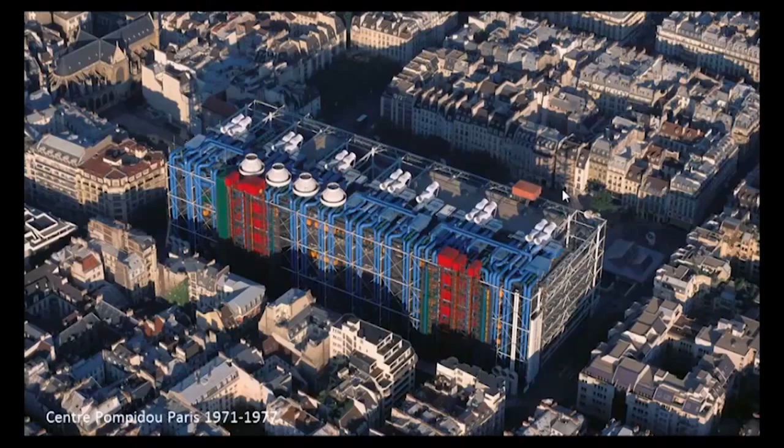And of course the structure, which was all brought to the outside of the building to create big, clear span, flexible exhibition space, so that this building could reinvent itself with each iteration of its life and each exhibition that came in. So you start to see these ideas coming in.

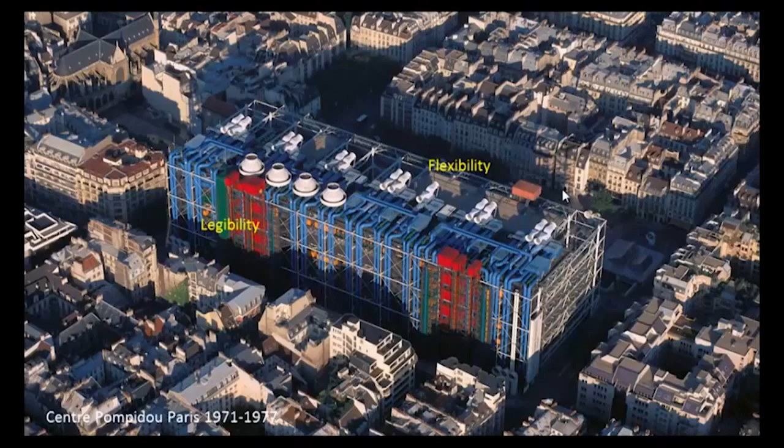One of the biggest things about this project, the reason they won it, was that they were the only entry from, whatever it was, 2,000 competition entries, that gave up half the site, made the building higher, broke the official 25-metre boundary for this part of Paris, in order to give up half the site to create a new public square. This is, again, at the very core of our architecture—that it isn't just about the buildings, it's about the setting and about giving something back to the city and creating a place as well as a building.

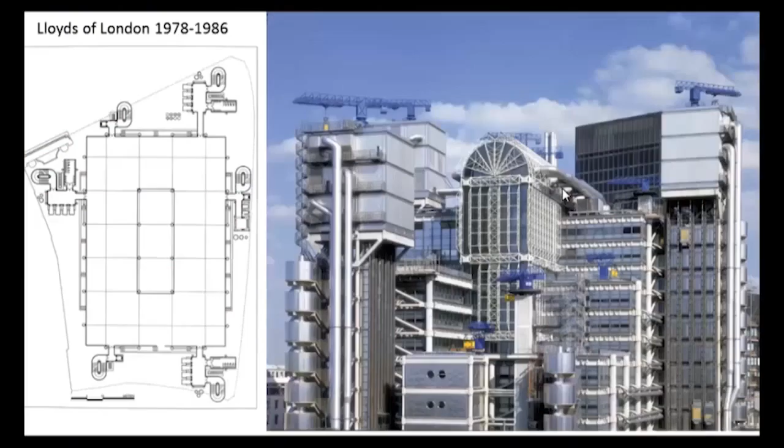I think these themes were explored further after the Pompidou Centre. Probably a few of you have seen 'The Brits Who Built the Modern World.' There's a series on at the moment, and they've been talking about how after the Pompidou Centre no one would give them any work because it was such a groundbreaking building. Even though it was very much acclaimed in France, I think the British public were a bit more wary about this kind of inside-out architecture.

But Lloyd's were very brave, and they gave this commission—they won this competition to build the new Lloyd's headquarters in London, which again has these ideas of legibility, where you can read the bits of the building, and of flexibility. The whole notion of this plan—what I think is most interesting about the Lloyd's building is the plan.

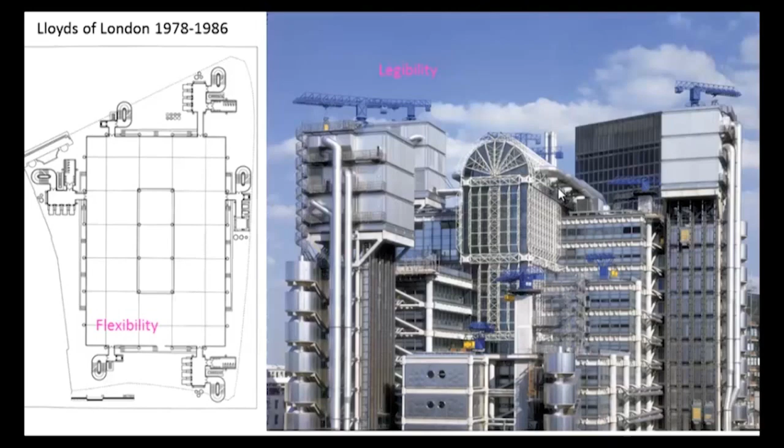It was a very strange shaped site, and they used the leftover space of the site to put all the cores to the outside of the building, something which traditionally sits in the middle of the building. This allowed them to create infinitely flexible floor plates, which became trading floors. This is kind of the birth of the trading floor, around this great atrium space in the middle, which was not what office buildings looked like at this point and was quite groundbreaking.

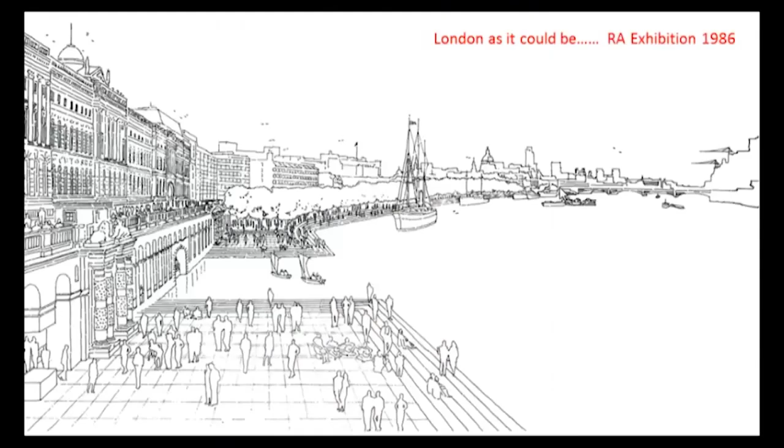The city—Richard has always had a preoccupation with the city and with urbanism, whether it's through influencing it academically in studies like this. This is what London could be: the embankment of the River Thames if there weren't cars hurtling down the side of it.

Rather nicer. Also through his politics, his involvement with the Urban Renaissance and the Labour Party and the GLA in shaping the way that London has grown. But also, to be honest, in shaping the skyline. Over the last 3 decades, there's 1 or 2 of our buildings that have appeared there, and some other equally shapely ones that aren't ours—part of an amazing changing city.

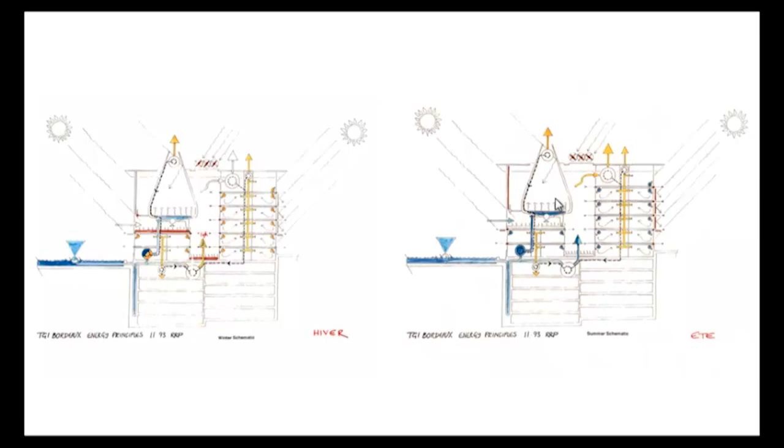And as the agendas are changing, looking also at sustainability in architecture and beginning to look at how our buildings could respond to a need for more sustainable design and be naturally ventilated and not rely on mechanical systems. Themes that, in Ivan's case, he continued to explore in the National Assembly for Wales.

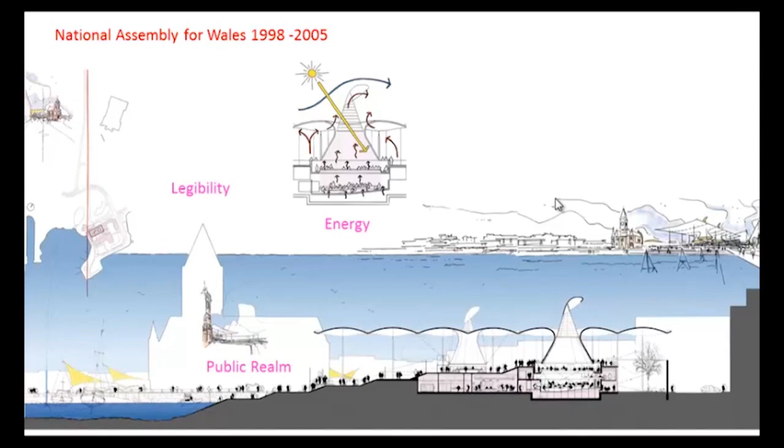And the debating chamber itself is a huge wind cowl that draws the natural ventilation through the building. Sadly, 9/11 changed the nature of this building a lot because this idea of access to the Parliament and the sort of freedom flowing of people, suddenly we had bomb-proof glass all the way around it, which changed the nature of the project a bit.

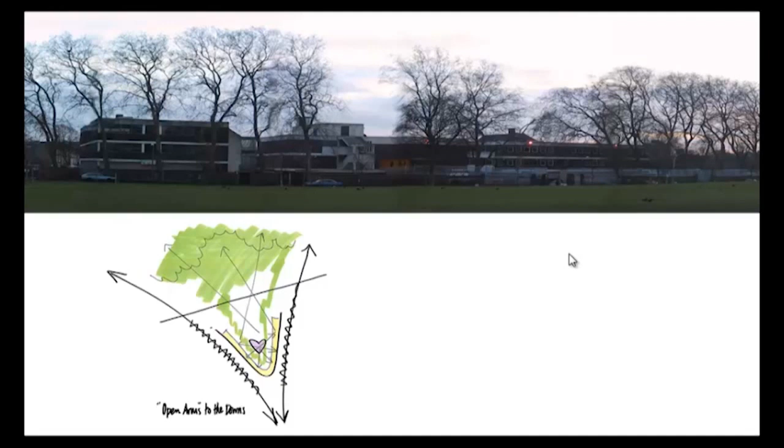In terms of the client and the setup of the project, we were very lucky because Michael Wilshaw, who is now well known for being the head of Ofsted, at the time was one of these super heads, and he'd been brought in to start this school from scratch. He was available, he was already on board by the time we were appointed. So we were able to work with the guy who was actually going to be running the school, which was fantastic.

So we had an amazing, enlightened client, and Michael had an incredibly strong view about how the school would be run. He wanted the design to encapsulate that, to facilitate it. But we also had to bear in mind that Michael might not run that school forever, and so it had to have enough flexibility to change if the way in which the school was being run changed.

But the idea was that he felt that the way you get the best out of schools was that he wanted to create a series of houses, in the sense of not a public school sense, but in the sense that he wanted to give autonomy and responsibility to the core curriculum areas. So there's a year 7, maths, English, dance and drama and ICT, and each one of these would have their own house, effectively.

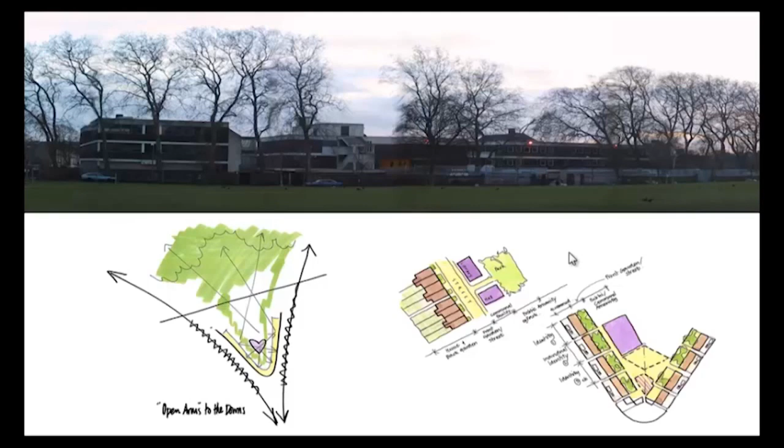And the idea was that the school is made up of a number of these houses along a street, albeit in our case a street that bends into a V, and that students would go to their house for the lesson in that subject and then move between houses, which is very different from the way that schools are set up.

And it meant that in terms of the section, this is a sort of notional section, it's only a 3-storey building, that it turns its back to the railway, so there's a completely solid wall running all the way around the back edge of the building, against which we created a top-lit resource space, kind of what would have been a library, I think, when I was at school, but a kind of computer resource space.

And then you move between these houses through a cloister, which is the sort of set back ground floor that you can see there. You enter the building at the ground floor of the house, you circulate up in the cores that separate the houses, and then there are 2 teaching spaces on the 1st and 2nd floor, which look out to the playground and to the downs beyond, but are accessed from galleried walkways which run past these triple height resource spaces.

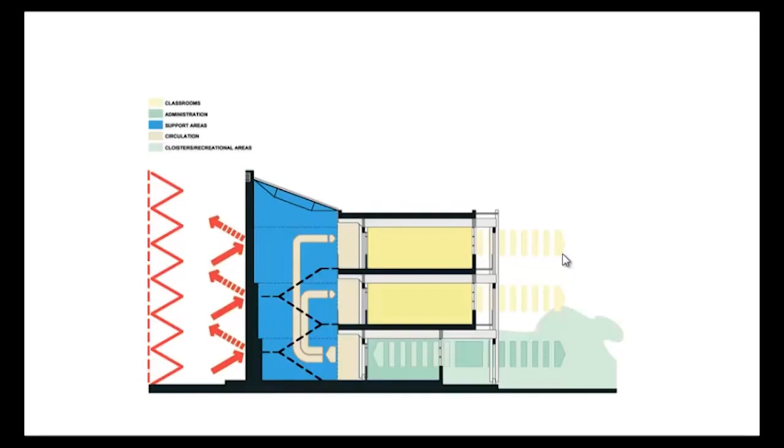So in effect, you've removed any corridors. The school has no corridors. This was one of the overriding theories behind it: trouble in schools with discipline and bullying tends to happen in corridors and toilets, dark corners where no one's watching. Michael's view was that if everywhere is naturally under surveillance by everybody, you avoid those issues. And he appears to be right, because the school's got an amazing track record.

So this was a very early model, but you can see this massive wall - a lot of people call it the IKEA wall, unfortunately coloured blue - that wraps all the way around the back of the site with the railway tracks. That's the Stansted Express line, so you see this when you go to Stansted Airport. Then there's the other railway line on the other side, the downs on the right-hand side, and the building wrapping round.

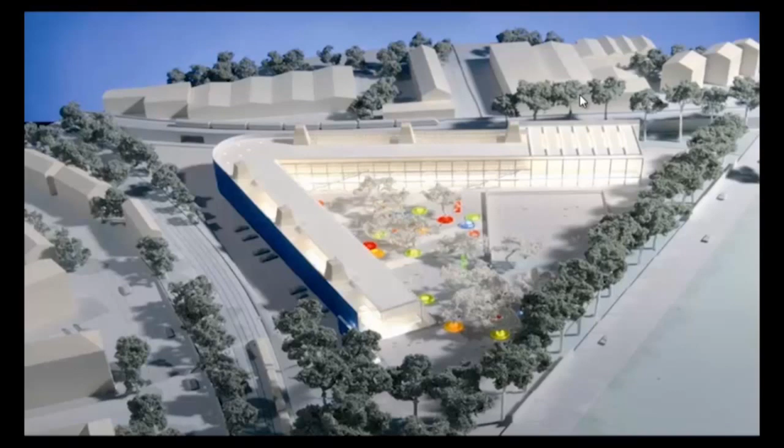The other thing you'll notice is it has these towers. Between each of the houses, the stair cores which provide vertical circulation are each topped with a wind tower, a bit like the wind cowl of the Welsh Assembly. They have slatted sides, and the natural movement of air draws air up through the building, promoting natural ventilation through the facade, across the floor slab and up into these resource spaces and out. It's got quite a powerful exaggeration of the natural stack effect. At the top of these wind towers are fans which can be turned on to drive that stack effect harder in extreme conditions in the height of summer.

It's been overall quite successful. Looking at the plan, you can see it's very simple - you've got this series of cores, between which are triple height resource spaces. So these are the cores - that would be a house from there to there. Teaching spaces, triple height resource space, a corridor which isn't a corridor, it's a gallery. And each one of these has a wind tower on top.

And there are two special spaces, if you like. At the fulcrum of the V is an auditorium space, and at the far end is a large multi-space sports hall, a space big enough to do exams in and to bring the whole school together.

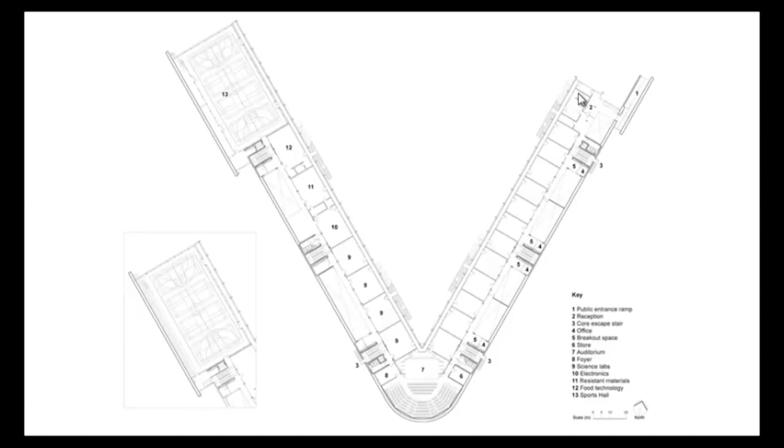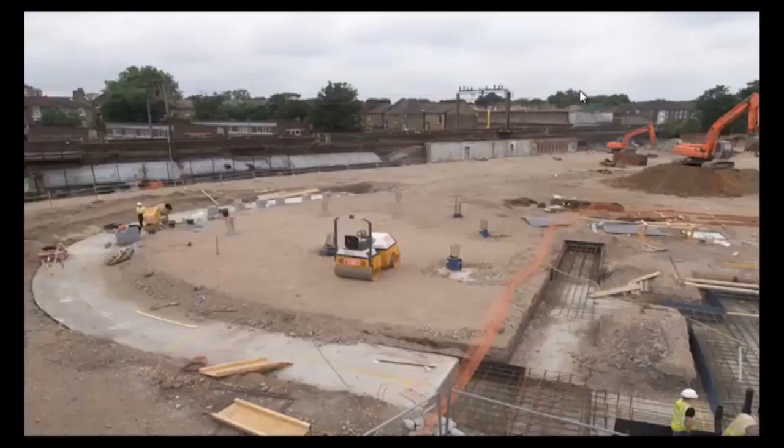So that was the old school - it was knocked down and crushed up, and we reused the old school to make the foundations. It was crushed on site and used as the hardcore to make the foundations of the new building, which you can see here. That's how close the railway track is to the edge of the site.

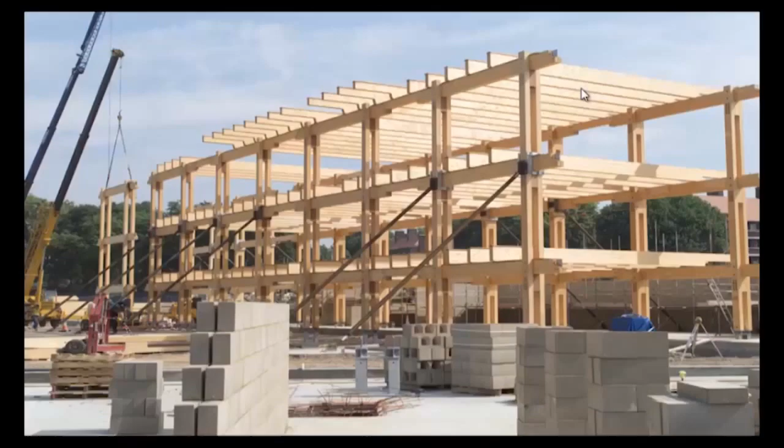You can see the shape of the building starting to take place. It's a timber frame - a glulam timber frame. At the time it was the biggest one in the UK. I'm sure they're bigger now.

But what was amazing about it was, a bit like Meccano, the way it was built - the pieces were all worked out well in advance, made in a factory in Holland, shipped over on big trucks, laid out with numbers on the ends of them on the site, and laid down as 8 frames and put together on the ground and lifted into place. It went up incredibly fast - there was a point where they were doing a bay a day. It was sort of beautiful.

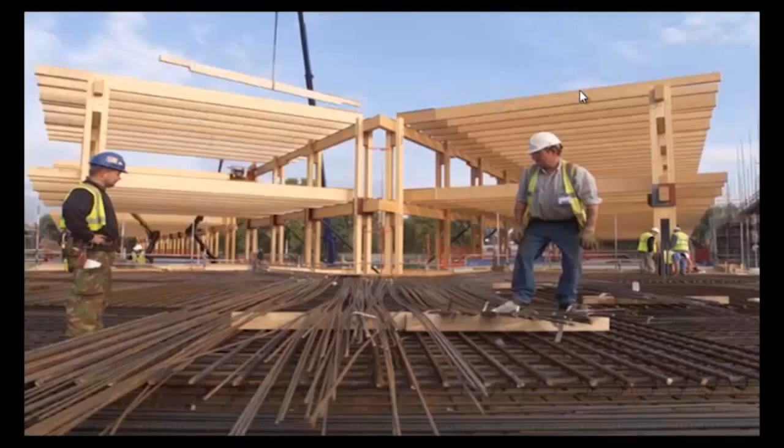And that's where you see the two wings coming together in the space that was to become the auditorium. You can see how quickly it went up, and there you can see the H frame lying on the ground waiting to be lifted. It was a relatively small site, really, in terms of site logistics.

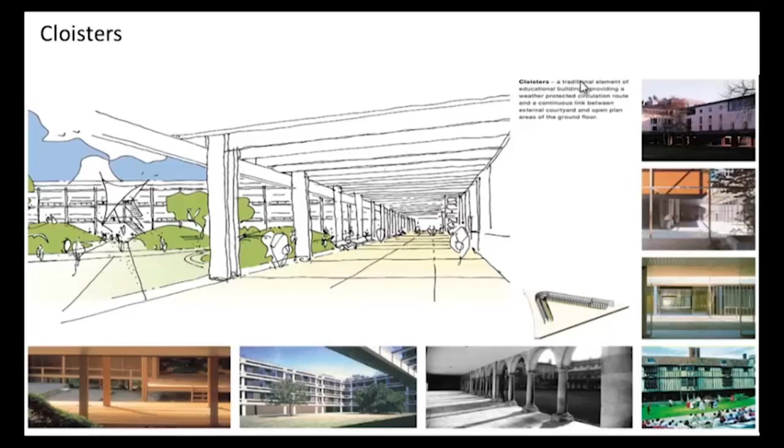So this just gives you an idea of some of the aspiration and where that went. That was the idea of the cloisters - and these aren't retrospective sketches, these are genuinely from the mood boards at the beginning of the process. And that's the cloister now. So that's year 7 entering their year 7 house.

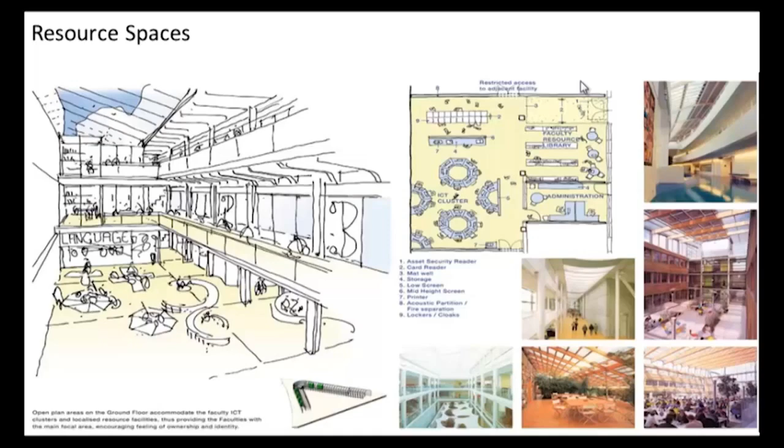This was the idea of the resource spaces with these galleries and the teaching spaces where you can see the numbers 1, 2 and 3. It's harder to photograph than it is to draw. That's the base of one of these triple height resource spaces. The colour panels are acoustic damping, and those are the walkways that run between them.

So this is what replaces a traditional corridor. And you can see that the structure, coming back to these themes of legibility and flexibility - the structure, you can see absolutely how that's gone together. You can see what sits on what.

There's a primary frame going this way, there are secondaries that sit on it, there's a floor slab that sits on that, and between those are partitions and glazing. And you can see the bolts.

The idea in flexibility terms, with this subdivided bay on the 1.2 grid of the beams, that's the planning grid, and the walls can be moved between the classrooms to clip into any one of those effectively, which at the time I thought, yeah, that'll never happen.

But within a year or two of the school opening, they were already under pressure to take bigger class sizes, and they did—on 2 floors on one side of the building—move the classroom walls and turned 5 classrooms into 4, made them bigger, and it was a relatively easy job to do. So it did work, it is flexible.

Since we did this project, it's been massively extended. It's got a 6th form college built onto it, another 5 bays were built on. It's almost unrecognisable now as the building it was back then.

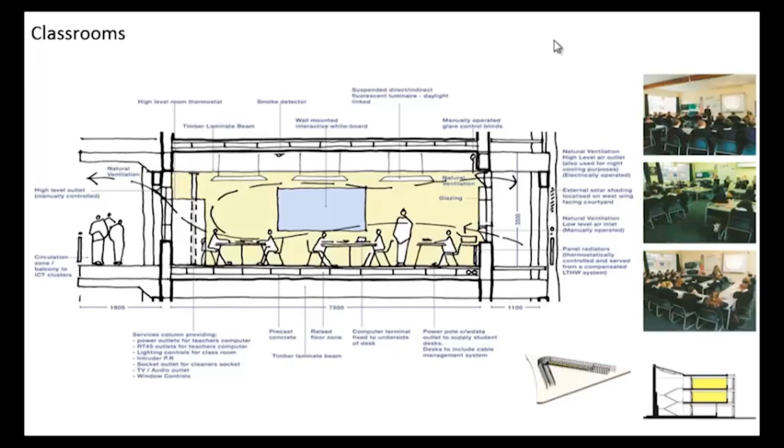The classrooms address the courtyard, the central space, and the downs beyond. Again, it's quite simple materials—you've got an exposed soffit with these perforated metal, colourful baffles hanging to absorb sound, exposed timber, and then sort of relatively cheap and cheerful cladding.

This is the auditorium space. One nice thing about the school before it was burnt down was it had this quite dramatic auditorium space, and even in the modern 60s concrete building you saw a picture of, part of this had been kept, but obviously it went when they burnt it down.

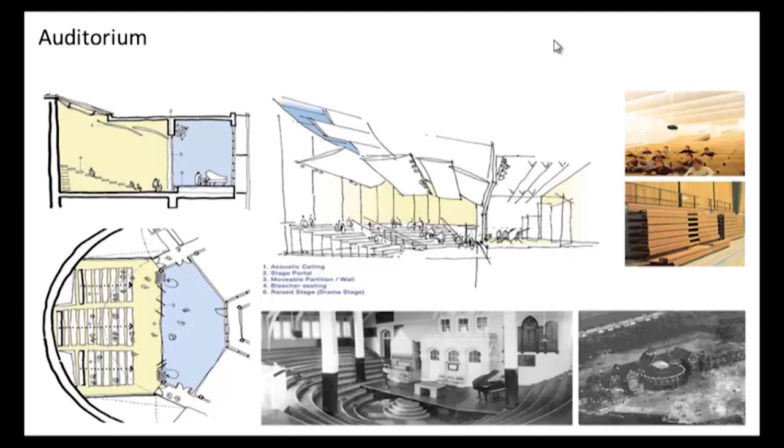So the auditorium space we were trying to create at the fulcrum of this V was in part in reference to that. That was before the seats were fitted, but it gives you an idea.

And the facade was very much built up of these layers—we couldn't afford a lot of posh solar louvers, but the facade being set back from the frame meant there are walkways that act as the fire strategy. All the classrooms open out onto these external walkways, and in case of fire they all pile down into the playground. That created a depth in the facade that naturally shaded the glass.

I think this, for me, was very much one of those projects where you felt—we always say our best projects come from the best relationships with clients, with the users, and if possible with the contractors. But this really was a case where this project would not have looked or been anything like this without the input of these two men. It felt quite a special project to be involved with.

So that was Mossbourne. A bit later on—I spent 2 or 3 years on Mossbourne. We built it in 18 months, which was pretty quick, and I think partly because of the way that the frame went up.

This, by contrast, is kind of the opposite end of the spectrum, in my experience anyway. I was on this project for 5 years. It's 140 million, so a great deal bigger. And instead of being a newbie out of college who didn't know what I was doing, I was the project architect who didn't know what I was doing.

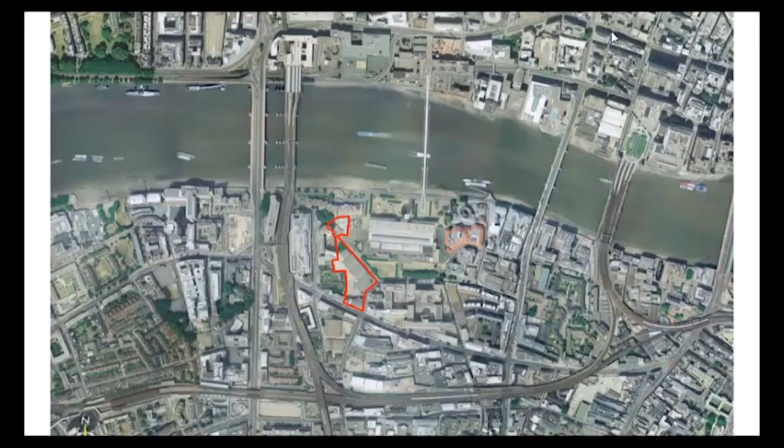So looking at the site, the usual site analysis, site response, all the stuff you do at college, we still do. This is a classic site analysis, looking at the constraints and trying to find a way through how we were going to resolve the very strange geometry.

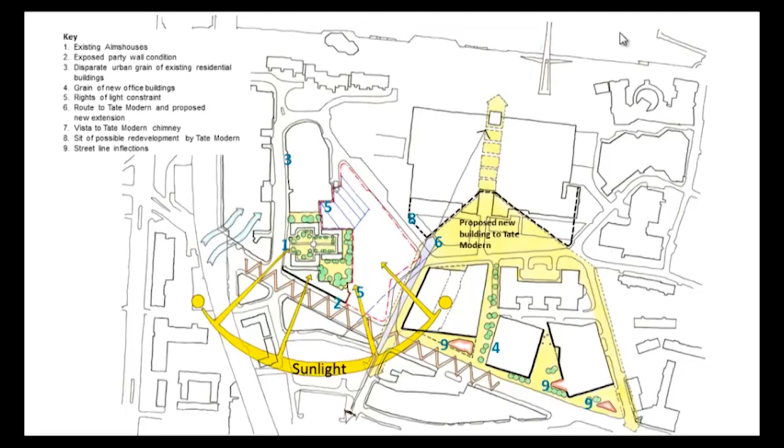The location of these almshouses, where the number 1 is, these are 2-storey high, listed, beautiful almshouses. On the right, where the sun is, is the Bluefin development, about 20 stories high. So our site had a 2-storey building on one side and a 20-storey building on the other.

How you mitigate that change in scale and find some harmony in this strange geometry. The approach was to wrap the mass of the project around the sides of the site to keep it away from these rather vulnerable almshouses. It was very important to us that this didn't act as a block between the hinterland of Southwark and the river.

So these 2 north-south routes were created that we were determined would remain public through what's effectively a private residential scheme. These 2 routes are, in my mind, the success of the project.

We then divided - those 2 routes slice up the mass a bit. We then started to slice it up into pavilions, effectively about allowing views out and permeability and movement through the site, which led us to 4 pavilions, all pretty much the same, and a 5th building, which you wouldn't even notice here, but is effectively a gatehouse, serving the purpose of ending this terrace on Southwark Street.

This is a classic Southwark Street sort of industrial architecture, rather lovely, and we needed to find a way of transitioning from that around the corner into our scheme. That was the role given to that building, which was for ages called the Gatehouse, and is now glamorously Pavilion E.

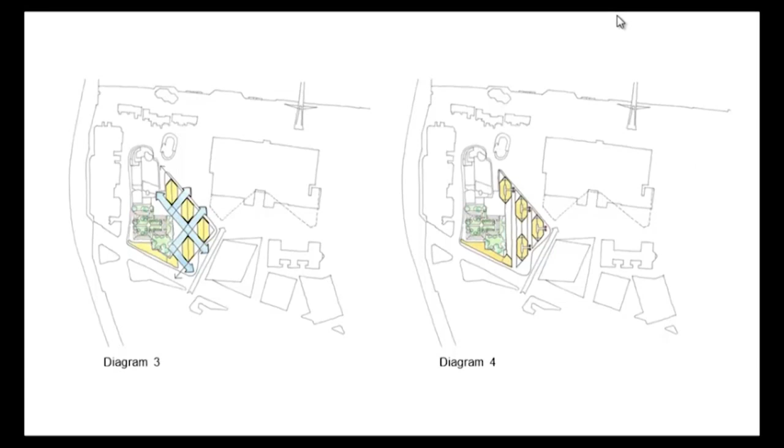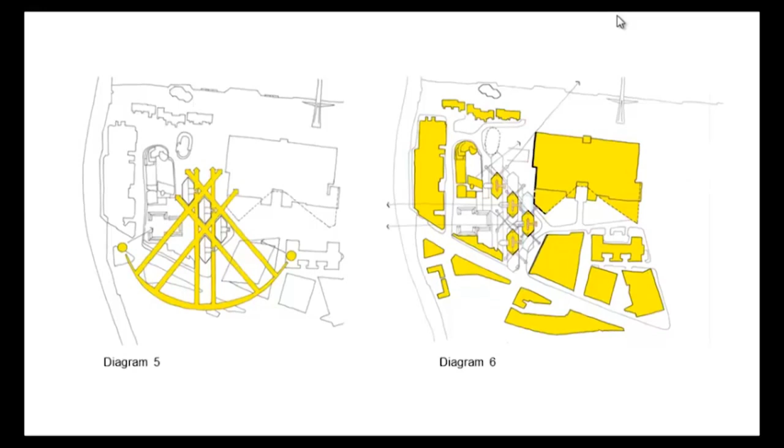So that was the project, this position of the pavilions. It allows sun in and allows views out, because obviously it's a residential development - they want to maximise views as much as possible, views to the river. That's what sells. So we're trying to create a geometry that allows maximum views to the river, but also makes the most of the views looking back across the city. You see it in context there with the almshouses and Tate.

Probably as big an issue was how we would deal with this change in scale, stepping up from these teeny tiny little things up against the Bluefin and higher. So the buildings are pavilions that step up - biggest pavilion I've ever seen, but they're called pavilions - that step up in 6-storey lifts. So it goes 12, 18, 24, then drops back down to 12, and finally back down to 6 for the gatehouse, which is more the scale of the Southwark Street Terrace.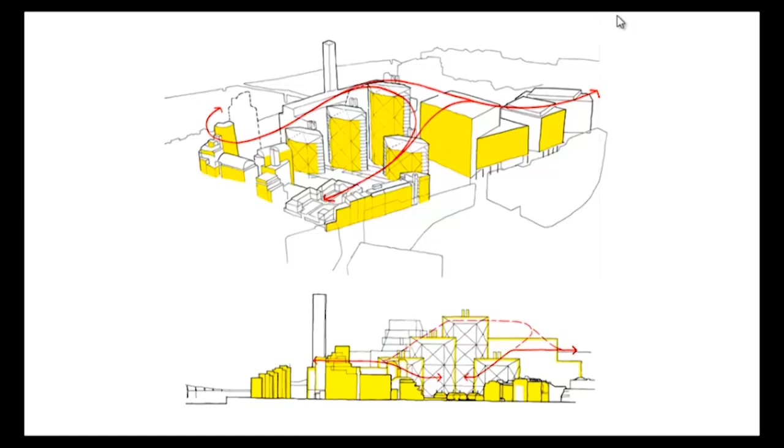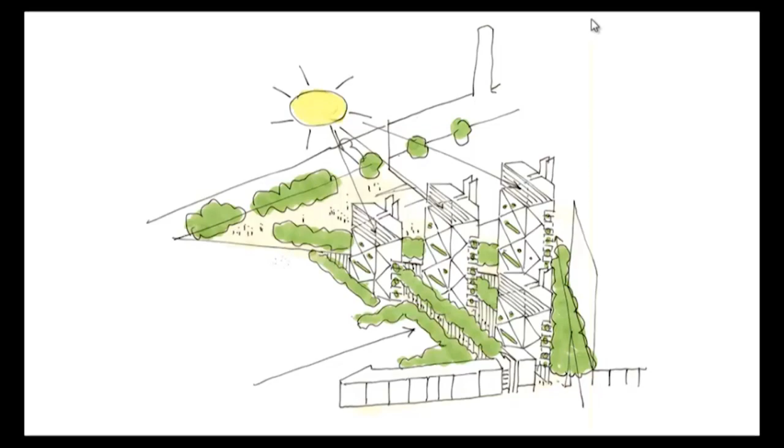So that's the kind of parti sketch, the thing the client now has on his wall, the little sketch of what we were going to try and do. Sun's in the wrong place.

We made early models to look at the massing and the relationship of these buildings to each other and to the surroundings. You can see here these are the routes that come through between the buildings - these north-south routes that connect through to the landscaped area next to the Tate and the ramp that runs down into the Tate.

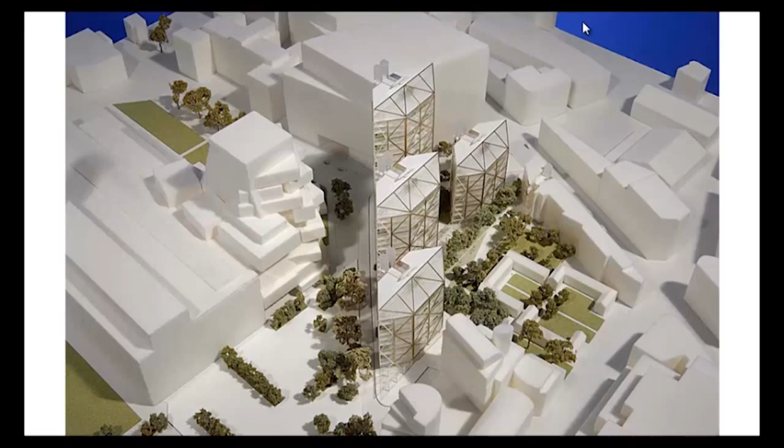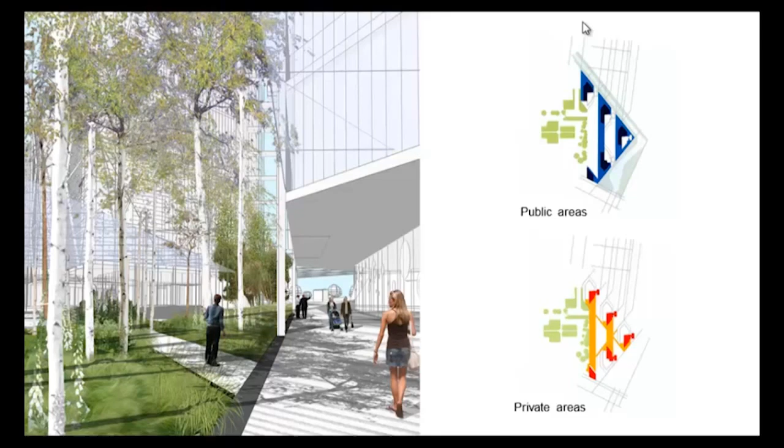I'd say these routes were always very important in the project. They were key. We sold them very strongly because it's this element of public realm again, and of the city, in the context of being more than just some posh flats. We made it a big sell in the planning, so the planners were very behind it, which helped us hang on to them.

And that was the aspiration for them, and we modelled how we thought they would look. They would basically be routes defined by these raised groves of planting, so you walked along next to a mounded grove of planting that separated the public walking path from the private entrances to the building. So you'd walk across the grove, and that was meant to suggest an element of privacy so people didn't stray into the building - rather than having fences and gates, we were trying to naturally control people's movement.

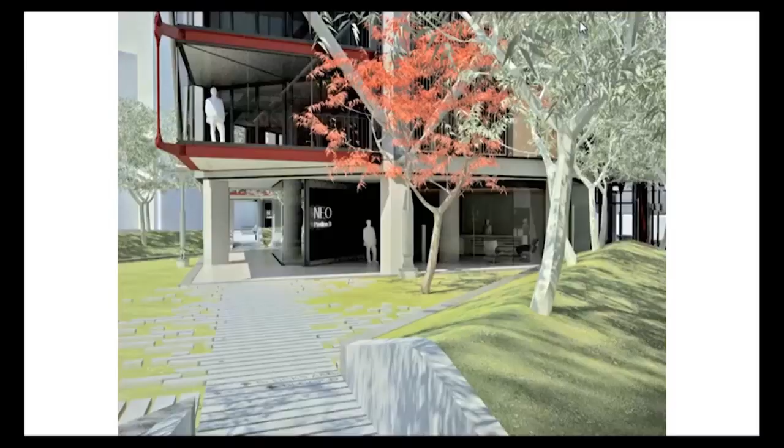The grove is actually - the bit you walk on is actually on the right of this line of trees. This is the residents' garden. But to my mind, the setting and the landscape and these routes have really made a lot of the success of the project.

I'll show you some more finished pictures in a minute. So you see here the arrangement. You've got the 4 pavilions, the 5th slightly strange shaped pavilion. The buildings themselves are relatively simple.

The idea was to try and create flexible space that could be configured in many different ways, so the developer could have all sorts of different flat arrangements on different floors, but which would have a unified appearance outside.

Again, the served and servant nature. You've got the cores to the right-hand side there, with 2 lifts sticking out of the building. And there's effectively 2 structures going on: there's the concrete frame, the gravity structure, which holds the building up.

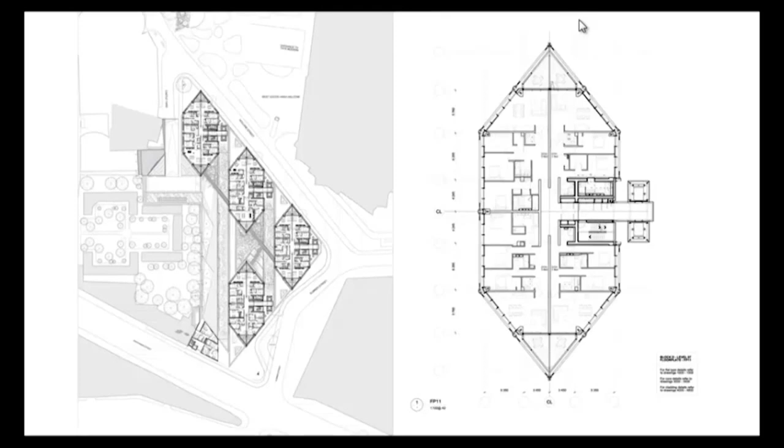But in order to avoid that getting too big, or having to use shear walls, which then fix the plan in a sense, because there's no moving shear walls or getting around them, we dealt with the lateral movement, the wind loading of the building, as an external brace structure. That enabled us to keep the structure that sits within the building rather leaner.

So you can see here the idea of the served and the servant space. It's a very clear diagram on the right there. It's a very efficient floor plate. It's a relatively small core to the amount of residential floor plate that you're getting, and very short travel distances to the flats.

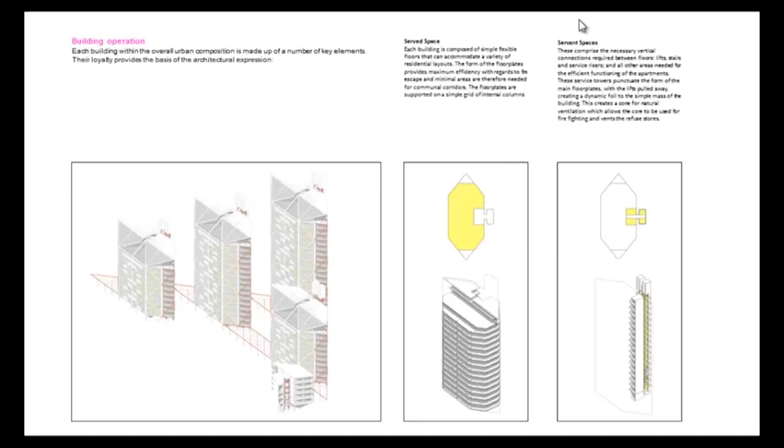And this diagrid, the system someone in the office described as fishnet stockings - wasn't quite the way we saw it - but this kind of grid wraps around the building and deals with all the wind loading. And that also hangs the winter gardens.

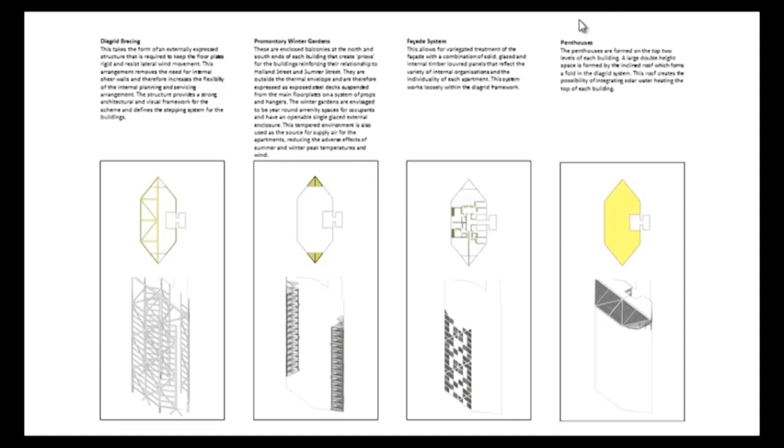So at the apex of each end of the building there are these triangular spaces. The idea behind that was that they would not be part of the thermal line of the building. They would be single glazed winter garden spaces. By being single glazed, they become far more transparent and therefore reduce the mass of the building as you look at it, because it breaks down the ends. You see through them much more than you do the rest of the glazing.

So you've got the diagrid bracing wrapping around the building, and from that are hung the winter garden structures, which are the red steels that you see on the right. So the bracing is serving 2 purposes: it's dealing with the wind load and it's hanging the winter gardens.

And you can see here, these are the winter gardens I'm talking about. So this part of the building is single glazed. The thermal line is from that point backwards. You get a more feathered edge, and you can see the bracing hanging these.

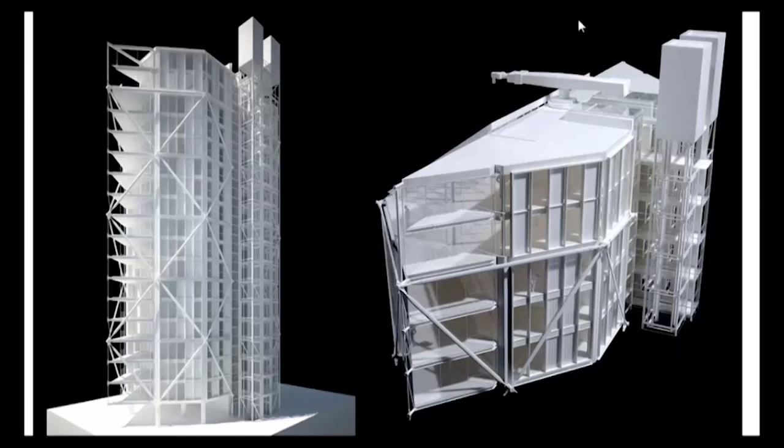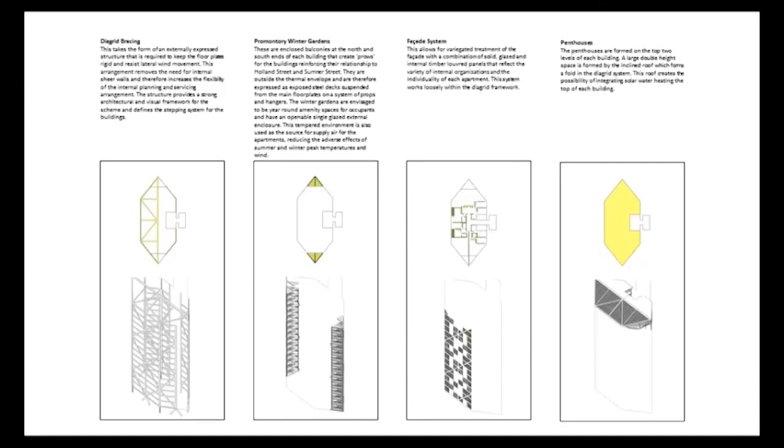The top of the buildings are the penthouses. And we wanted to use the penthouses as a way of tying the geometry of these buildings together in the way that they stepped. There's an angle that effectively aligns the buildings as they step up, so if you were to draw a line through these, there's a geometry that connects the top of these buildings, even though there's a 6-storey difference in each one.

In terms of the facade, they're big buildings, and we were very keen to make sure they didn't look commercial. So we did lots of things with the facade to try and break down the scale and give it a domestic feel. There's a sort of 3-storey expressed frame that breaks down the 12, 18 or 24 into bands of 3. And within that we played games with smaller panels and introduced wood into the cladding, which creates a sort of softness, but also talks to the palette of colours in the area, which tend to be that slightly yellowy brown brick.

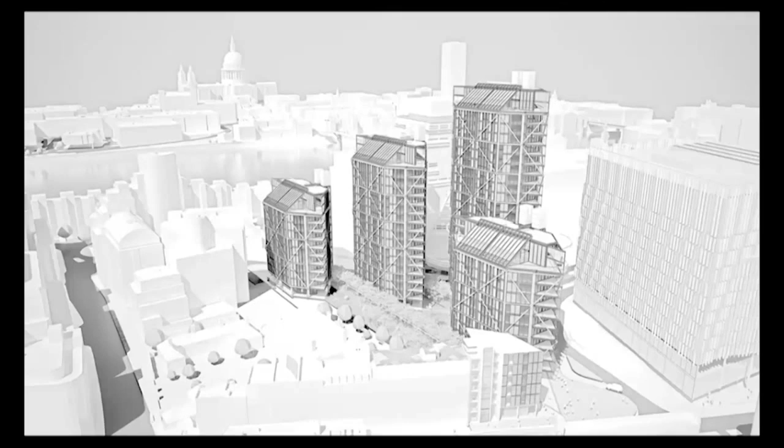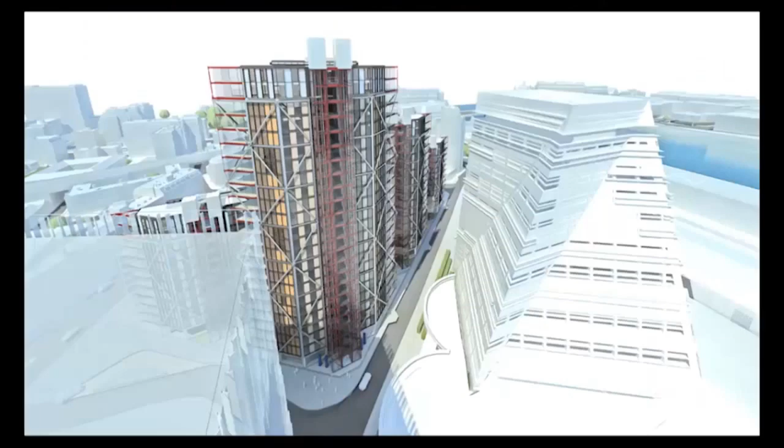That was a relatively early model looking at the potential Tate extension and the effect of it, because it was a bit unknown when we started this project what that was going to be. And it changed - Herzog and de Meuron changed the scheme a few times, so we were looking at how that would affect the relationship with our building.

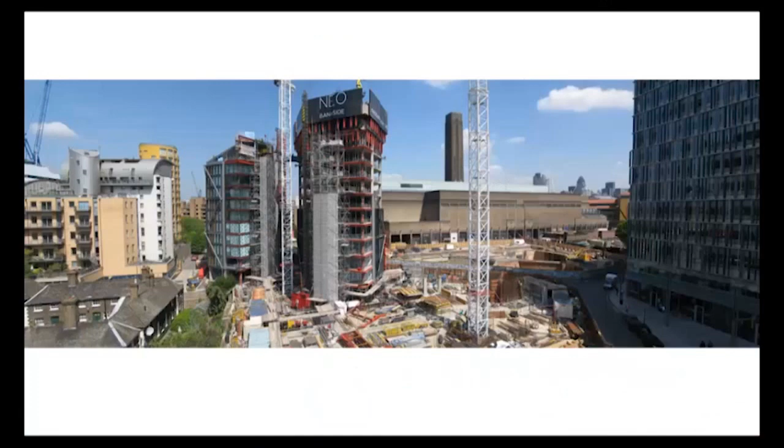So we started on site in 2009, I think, with Block A, which—never buy the first block in a big development. Block A is full of mistakes.

Block A took a year, and then we sped up, because we'd worked out a lot about what we needed to do. So whilst Block A was being finished, Block B superstructure was coming up.

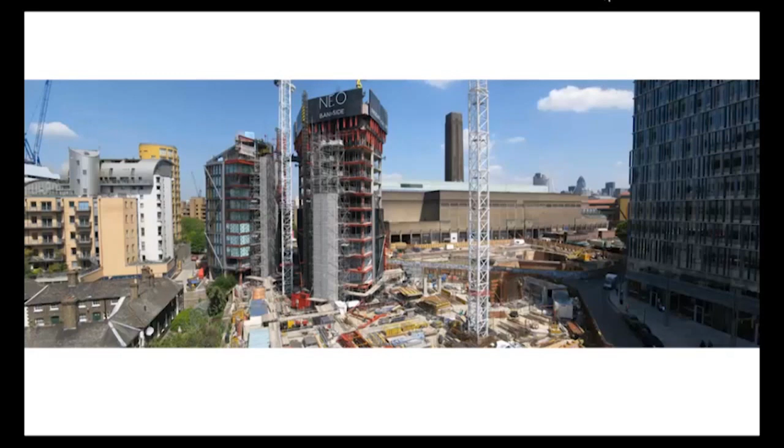And it's a very tight site. You see how busy that site is—you can't move, and all the stuff was being stored on it as well. The site behind is the Tate site, starting out with the big oil tanks that are now complete. So it was a very congested little corner for two big building projects to be going on simultaneously.

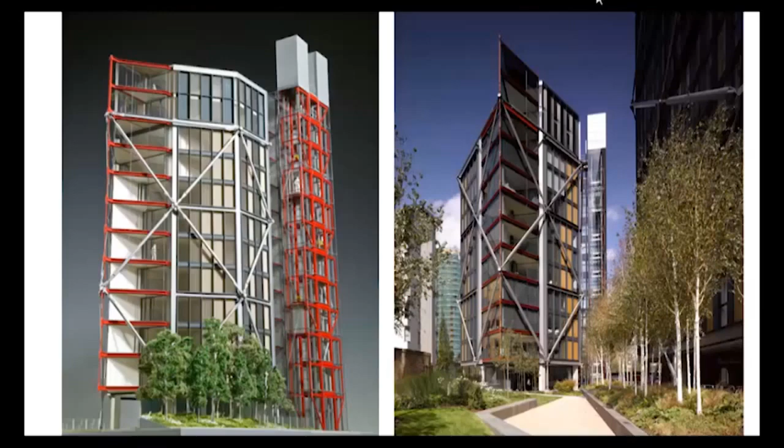Quite quickly it came out of the ground, and there it is looking across the landscaping. You can see the blocks stepping up and then back down. In the foreground you just see Block E, the small block, and a pavilion which was added fairly late in the process to provide a gym pavilion in the garden for the residents. You can see how close the early models were—it's not a million miles away.

That's a bit of detail of the facade—this idea of trying to break up the scale of the facade and create a layering with the bracing and the facade, and then the different materials within it.

The lifts, of course, classic Rogers lifts, expressing the movement. The idea was that the lifts give everyone an opportunity to enjoy the best views across the river. The way the lift's positioned, when you go up you see the river, you see the Shard—it's an absolutely amazing view from the lift. So even if you've got a small studio flat facing in the wrong direction, you still get the dramatic view when you go up in the lift.

One of the amazing things about this project was an utterly enlightened client who got that quality and integrity, and actually allowed us to do it properly to give him value rather than cutting the cost to make it cheaper. They've made a killing on it, so they're a very happy client.

We were given the opportunity to do everything, including the interiors. So this is from the lobbies, which we were able to design right down to that desk—the reception desk, which is also a post desk, the posts for the entry gear, everything—which was a real luxury. We don't always get to do that. We tend to only do shell and core.

This is one of the lobbies where you come out of the lifts, approaching the flats. And then the flats themselves, which are very simple. A lot of them have been interior designed since, but this was how they were when we finished with them, if you like.

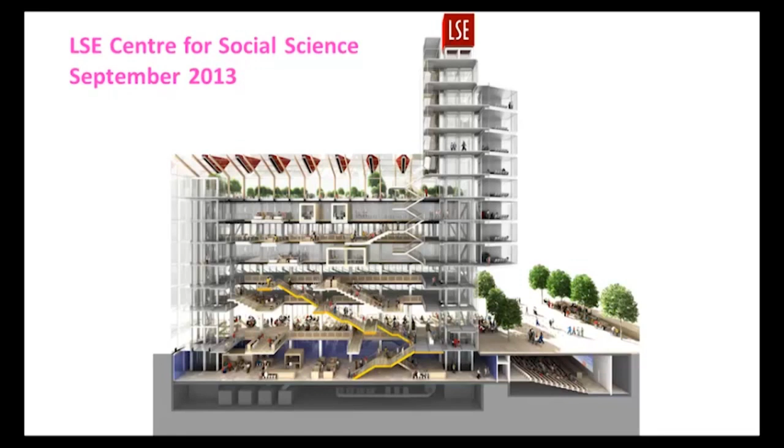So these are the 6 competition boards. Every now and then we do competitions, and it's intense, but it brings you back to some of that fun of college, of having a very small period of time to come up with something, and it comes back to relying on those kind of core ideas that generate a response.

And in this case, it was a lot to do with looking past the brief. There's a joke in our office that Ivan never reads the brief. This is an Ivan job again, like Mossbourne. Bankside was with Graham.

The brief was for a site that is about sort of that big. Our scheme looked at the LSE campus, and we said that in order to make a meaningful building, you need to look at the campus as a whole, which is utterly disjointed. You can't find your way through it, the routes don't go anywhere, and it's very hard to identify which buildings are part of the LSE.

So what we decided to do was create a big square in the middle of it. A bit like the Pompidou approach, we gave up a large part of the site to create the new LSE square. I really need a pointer for this because I'm going to stand in it, but never mind.

This is the new student centre that's just opened, that's been in the architectural press a lot recently. And this is historically the home of the LSE, the old academic building, and the library is the big building at the top there. There's a huge student flow, north-south, up Houghton Street to the library, and east-west from the eastern edge of the campus, the LSE Towers, to the student centre and beyond.

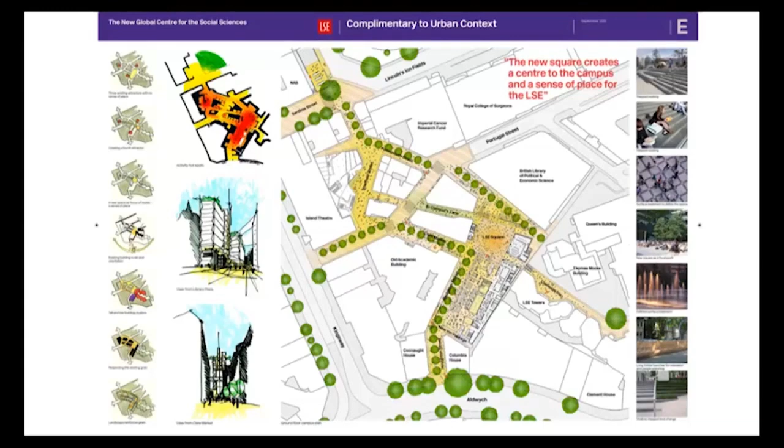And I think with competitions, so often that's what you're doing - you're setting an approach and a team that will work together, not necessarily the solution that we're all going to see built. So the building itself, the idea was that this is the new square that's been created. We chopped down this building, sliced this building off, and created a new core on the end of it, addressing the square, and created a building that has a front door and a new address for the LSE on this square, and a kind of big vertical circulation spine addressing that square.

The building itself - and it was funny going around the new Steven Holl building, because there are some similar issues about trying to create a building that is effectively two rectilinear pieces of accommodation with a shared sort of atrium space, where you're trying to create informal mixing between staff and students.

One of the things in the LSE brief was they felt that their staff-student relationship had become far too hierarchical. The academics like to sit in their offices and do their thing, and just see the students when they have to. Actually they wanted to mix it up much more and create spaces where they would interact more naturally and less formally.

So the idea of the scheme was that we'd create this sort of central atrium space, which I think Ivan described as a bumping space, full of breakout study pods, study areas, informal performance spaces - the stuff of competitions.

But there's a very clear zoning strategy to the building, which is to do with creating the most public elements at the ground floor, with the refectory and catering and restaurants. Sandwiched above and below it are the main teaching spaces, so you're dealing with the highest volumes of movement at the bottom of the building, and above that you move into the academic departments and professional services provision. We wanted to celebrate the movement of these large numbers of people down into the lecture theatres, through this kind of generous staircase that flows through the public spaces.

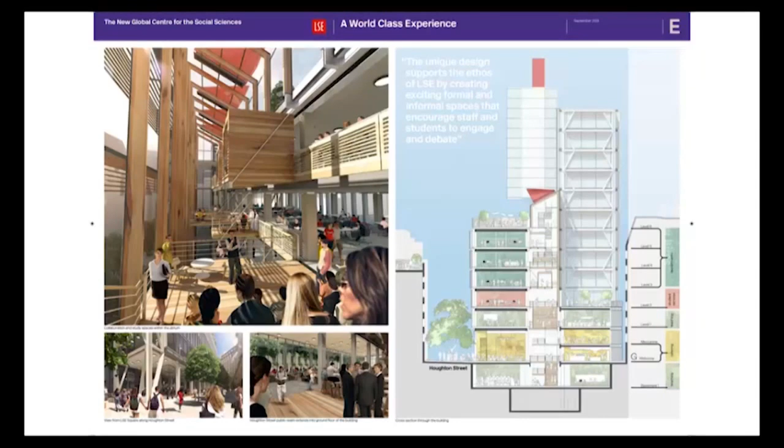So that's the new public square with the big lecture theatre underneath. These are other teaching spaces grouped around the base of the atrium, connected by this flowing circulation. That's the public part of the building.

This circulation stops at this floor, and the floors above are served by vertical circulation. This is the lower building, relating to Houghton Street, which is 6 stories. In the foreground is the big part of the building, the 12-storey bit that relates to the scale

of the LSE towers and the taller buildings on the site. You can see the pods and the projections. The idea was that these were pieces of furniture - you can see the little diagrams on the right - that the LSE could almost choose what they want. They could have 2 pods, 5 benches, and 2 performance spaces, almost clipped into the atrium space to encourage this dynamic flow.

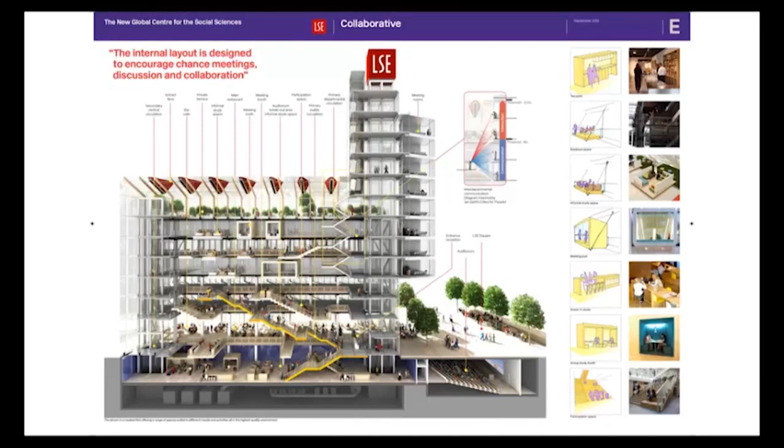In plan terms, in the lower parts of the building, you end up with effectively these are the 2 buildings, which the lower parts are linked, and as you go higher up the building, this drops away as a terrace, and you just have the taller part rising up for another 6 stories. But the circulation and these 2 buildings are joined as an axis - you come up and enter the 2 parts of the building, and when that drops away, it remains the vertical circulation for the taller building.

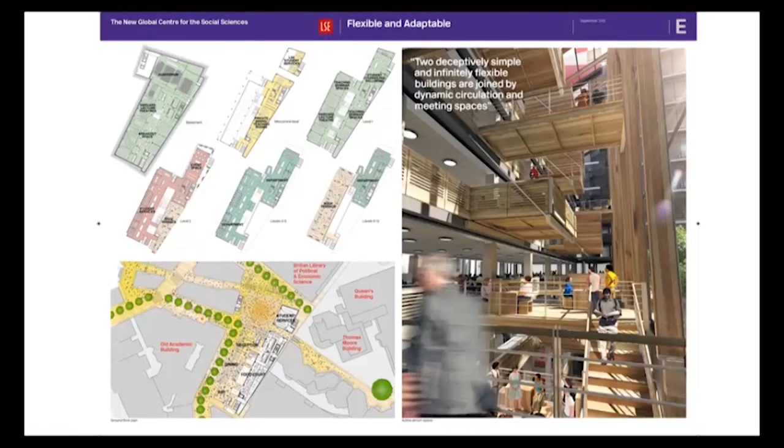Another view of that atrium space. Working with BDSP, who we also work with on the Welsh Assembly, there's an aspiration for it to be BREEAM outstanding. The proposal is that it's entirely naturally ventilated, and this atrium space helps drive that natural stack effect, a bit like other buildings I've talked about. That enables us to give people who work in the building control over their environment - openable windows and blinds they can pull down, as opposed to a building controlled by a building management system they have no interface with.

So that's the aspiration. As I say, the one thing... hang on, let me go back one... the one thing you can be certain of is that it won't look like that.

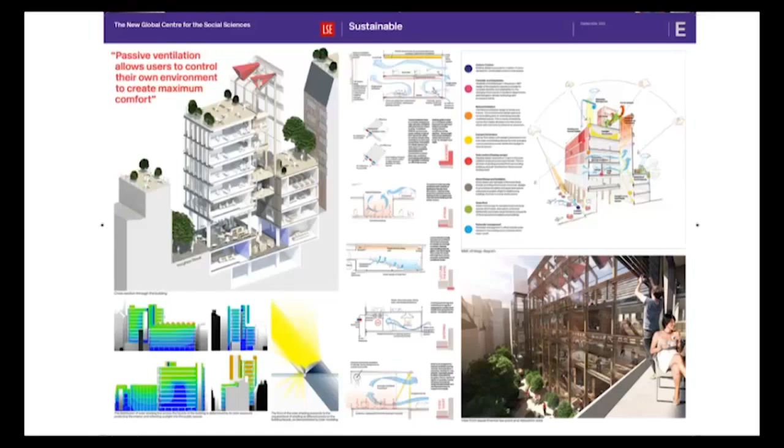In terms of the expression of the building, they felt... in the interview - I did the interview, Ivan was in Australia when we came to the final interview - it was probably the toughest interview I've ever done. Partly because it was a panel of 16, most of whom had professor in their title, and they had a lot of views on the nature of architecture. They're a brilliant client because they're prepared to debate and discuss these things - it's not all driven by money, but it's also pretty tough grilling in an interview situation.

One of the questions was: this appears to be an RSHP building - what makes it the LSE's building? I think that's the process we're now starting. We're unpicking a lot of the assumptions we made during 5 weeks at competition, and trying to get to know the LSE and understand much more how this building would actually work, and what the right expression of the nature of the LSE is - which is probably not this.

This was more to do with solar shading, flexible space, and a system-built frame - all the kind of preoccupations we have, which we now need to layer with the preoccupations of the client. It's through that relationship that we have our core principles we're building on, but we need to enrich those with an understanding of the specifics of the client and the brief. So that's what's coming next. It'll be finished in 2018.

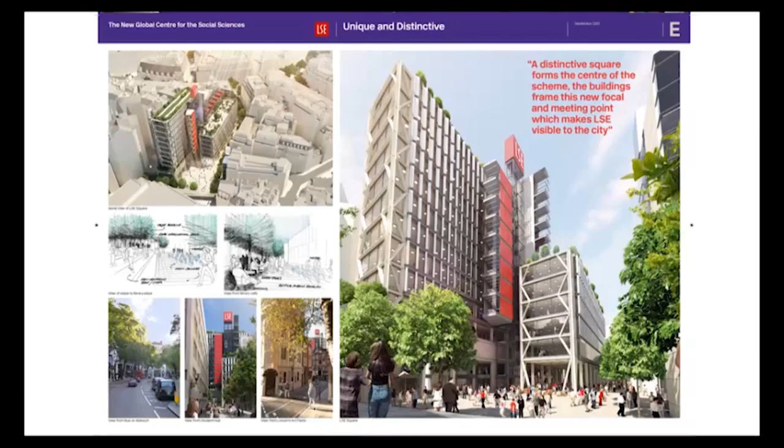Questions? Does anybody have one? Yeah, I've got one if no one else does.

Why is legibility important? Well, I don't think it has to be. To us it's important because we think it's nice to be able to look at a building and understand the way it's put together - that everything in it is not just an expression of the way it's put together, but genuinely, when you look at a piece of the building, you can usually see what it's doing and understand that it is doing just that. There are other architectures which are more to do with image making, or creating a more sculptural, more artisan approach.

This is a kind of systems approach to it. We go through a process when designing which strips down what that piece of structure needs to do. For example, at the moment we're looking at whether the columns or wind posts are actually an expression of the moment going through it. It's a tool we use, but one which has integrity, because it means you're building what needs to be there, not just your view on what it should be.